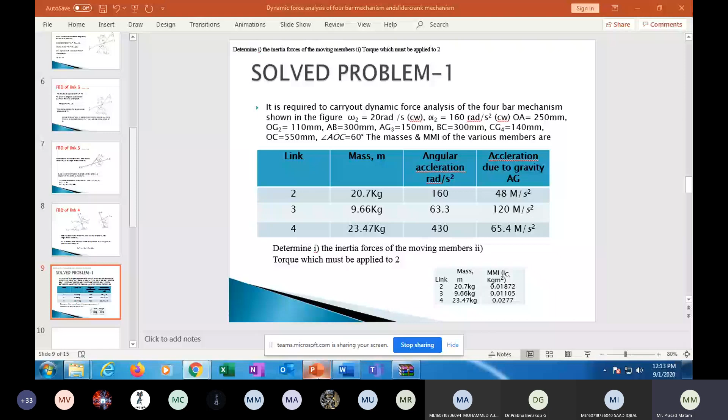Okay, now let us start our topic. Last class we discussed the dynamic force analysis. So again, let me recall what we have done in the last class. Just briefly, I want to revise what I have done previously.

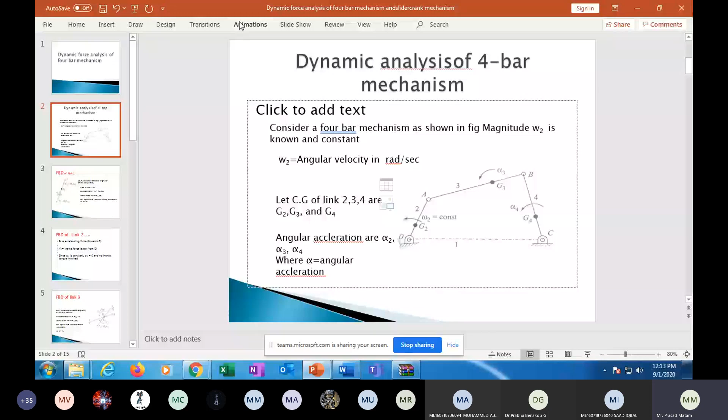So this is the 4-bar mechanism we have taken based on the dimensions. For this 4-bar mechanism, omega 2... okay, one sec, slideshow, pointer options. Okay, for this 4-bar mechanism, our aim is to find the dynamic forces acting on link 2, link 3, and link 4.

So for this, we have drawn the free-body diagram of all the links individually. G2 is the acceleration due to gravity at this point. Due to this acceleration, a force F2 is exerted towards O. And to maintain this equilibrium, we are keeping one more force, Fi2, the inertia force, acting opposite to the resultant force. This is how link 2 is in equilibrium.

Similarly, with respect to link 3 also, F3 is the resultant force and the balancing force is Fi3, that is the inertia force. Now these two are in equilibrium when F3 equals Fi3.

Similarly, this is how H3 is the radius. With G3 as the center and H3 as the radius, we have drawn a force vector Fi3. This force vector Fi3 is the combination of two forces, that is inertia force and inertia torque, Ta3, together combined to form a single force vector Fi3.

So we know as a result of this force and perpendicular distance, we are getting a torque. T3 is the resultant torque we are getting due to force Fi3 and H3, which equals Fi3 into H3. From this we can find H3 equals T3 by Fi3. T3 is the torque, which is nothing but I into alpha.

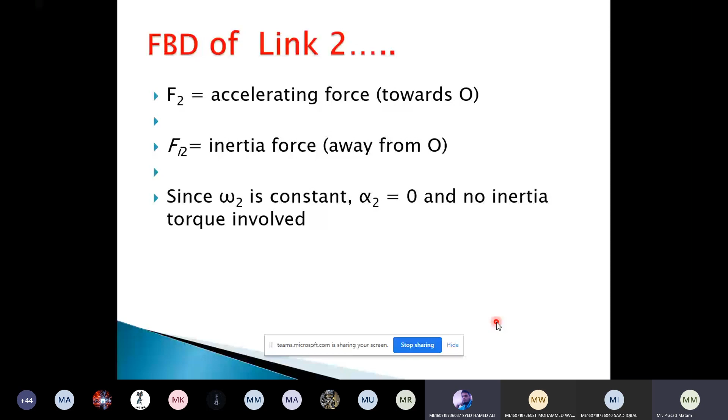So with this given data, we need to draw a configuration diagram of the 4-bar mechanism. They have given separately for link 2, 3, and 4, the mass of the link. M2 is 20.7 kg, M3 is 9.66 kg, and M4 is 23.47 kg.

Similarly, angular acceleration they have given: 160 radians per second square for link 2, 63.3 radians per second square for link 3, and 430 radians per second square for link 4. Similarly, acceleration due to gravity they have given: 48 meter per second square for link 2, 120 meter per second square for link 3, and 65.4 meter per second square for link 4.

So my question is, how did you get these values? Angular acceleration and acceleration due to gravity we can get from the acceleration analysis. For this 4-bar mechanism in kinematics, we will do the velocity analysis and acceleration analysis. From the velocity analysis, we get the velocity, and similarly, from acceleration analysis, we get the acceleration values.

For the same problem, we need to solve for the acceleration diagram. We have to draw the acceleration diagram, and from there we get all these values. Straight away, I am considering that you already know kinematics of machines. Similarly, for all the links, we should know the moment of inertia of all the links.

0.01872 is the moment of inertia of link 2. 0.01105 is the moment of inertia of link 3. 0.0277 is the moment of inertia of link 4.

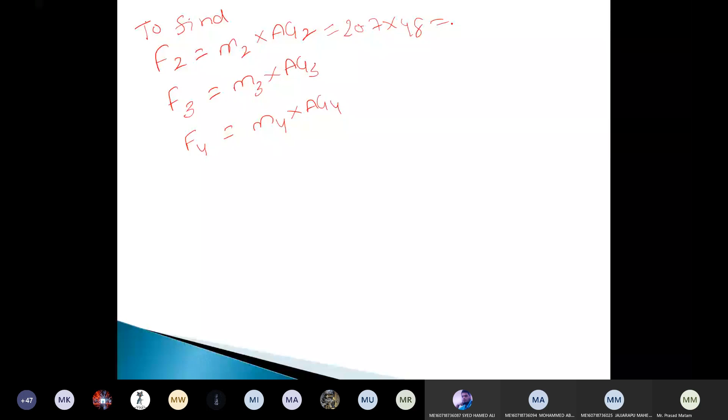What is the mass of link 2? Please answer. Mass is 20.7 kg, multiplied by the acceleration due to gravity on link 2, which is 48. Force on link 2 is 20.7 multiplied by 48. What answer are you getting? 993.6.

993.6. What are the units for this one? Newtons. Force is always in newtons.

Similarly for link 3, what is mass M3? That is 9.66. And acceleration due to gravity of link 3, AG3 value, is 120 meter per second square. Give me the answer for this one: 1159.2 newtons. Right, similarly find the force F4.

What is the mass acting on link 4? That is 23.4 kg multiplied by AG4, whose value is 65.4. If you take the product of these two, what answer are you getting? 23.4 into 65.4 gives 1530.36, that is nothing but 1530 newtons. Now we got F2 value, F3 value and F4 value.

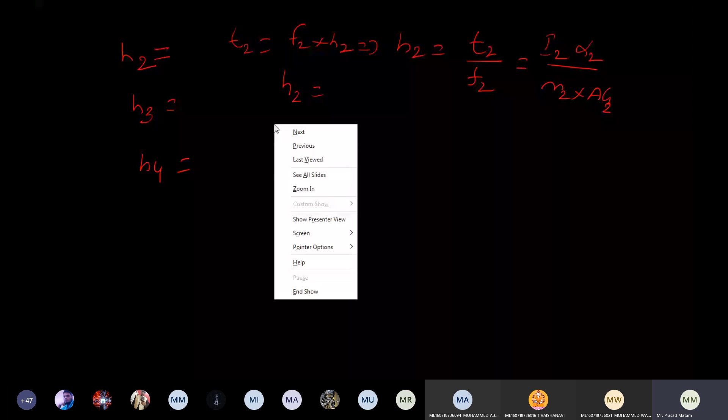So you can see here moment of inertia of link 2 is 0.01872. Just note down this. Moment of inertia of link 3 is 0.01105. Moment of inertia of link 4 is 0.0277. Write the moment of inertia of link 2, that is I2, which is equal to 0.01872, and I3 is equal to 0.01105, and I4 is equal to 0.0277. Sir, H2 just note down this.

160. What is the H2 value you are getting? 160, sir. Wrong. Wrong. H2 is 160 is wrong. Do again.

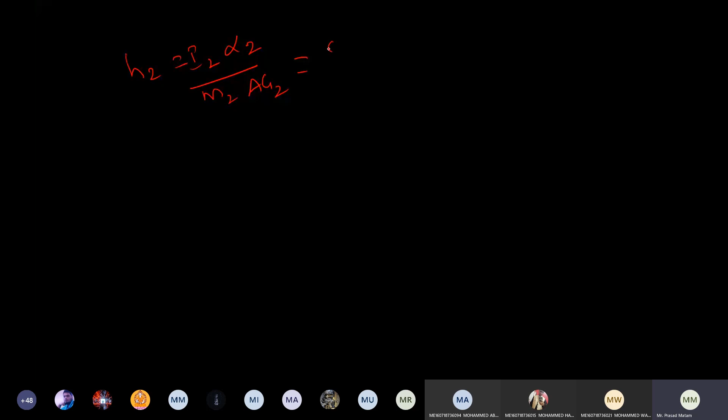Write H2 here. What is the formula for H2? Already I have solved earlier. Just are you able to see the screen now? I2 alpha 2 by M2 into AG2. So I2 I am getting, already I have given the problem, that is 0.01872 is the moment of inertia acting on link 2. What is the angular acceleration on link 2?

That is 160. What is the force F2 you are getting? Mass of link 2, how much you are getting? Or already we have found the force vector F2. What is the value of F2 we got? 993.6 newtons, which is a combination of M2 and AG2.

Now solve this and give me the answer. So on solving this, I am getting the answer as 3.01, sir. 3.01 into 10 to the power of -3 meters. This is the radius we need to find. So with this radius, we are drawing G2 as center. With this 3.01 as the radius, we have drawn the circle.

Similarly, let us solve for H3. What is the equation for H3 again? I3 alpha 3 by M3 and AG3, which is what is I3? I3 value you are getting it as 0.01105.

What is alpha 3? 63.3 radian per second square. What is M3 AG3, the force acting on link 3? What is the F3 we got? That is 1159.2 newtons. Solve this equation. How much you are getting? This value comes as 6.03 into 10 to the power of minus 4 meters.

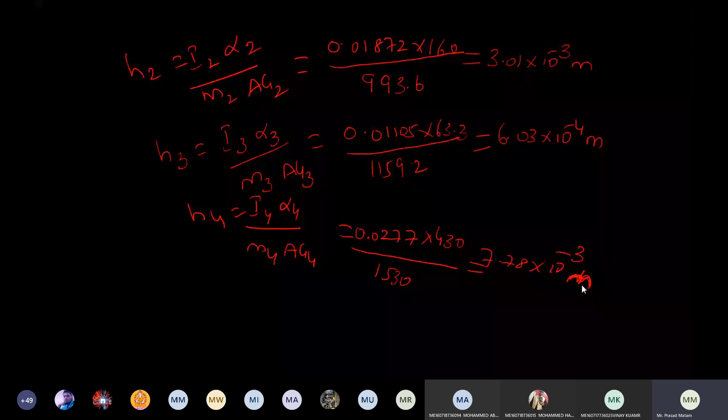So for link 2, this is the link 2 I am having, which is making an angle theta. This angle I have given as 60 degrees. Got it? So this is having torque T2. This amount we need to find. Okay, so now since this point, this is point O. This is, sorry, I will do again. This is giving some.

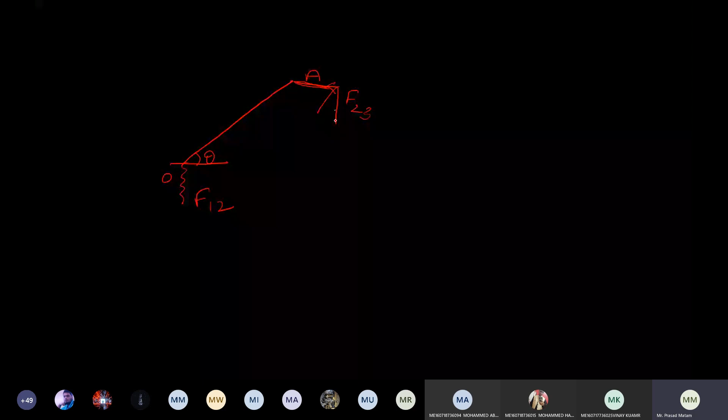For this force vector, we need to draw a perpendicular line straight. So here it is not showing a straight line - I will show here. A straight line has to be drawn. Extend these two lines, so this angle is 90 degrees.

Now F23 into this distance gives your torque. Measure this distance, H. This is OA - already we know the length made by OA. With the given length OA, we draw a line making an angle theta equals 60 degrees.

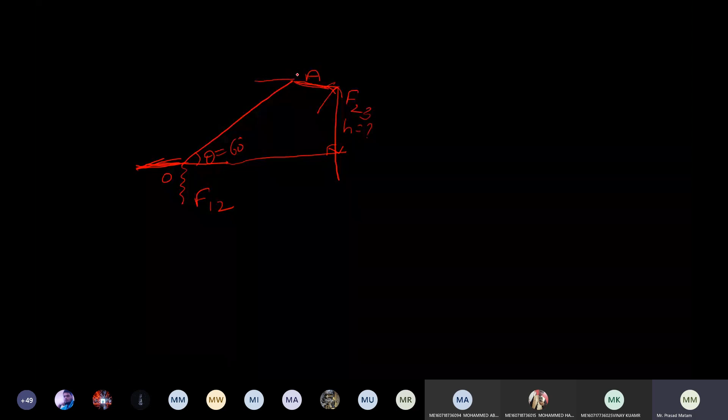Now if you know this force vector F23, to maintain equilibrium, one more force vector of the same value will act in this direction - sorry, opposite. The force vector will act in this direction, opposite to force vector F23. So this is moving towards, now this force vector has to move in this direction.

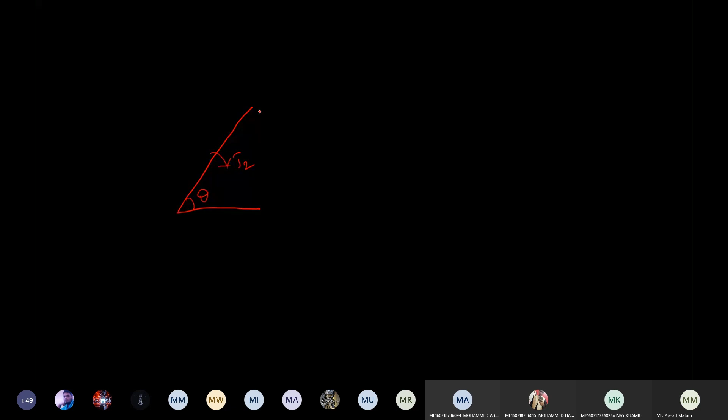So this is making angle theta. Our aim is to find T2. So this is the direction of the force vector F23. Similarly, F23 is always parallel to F12. This is the force acting at point O, this is point A. At point O, F12 is the force acting. At point A, F23 is the force acting.

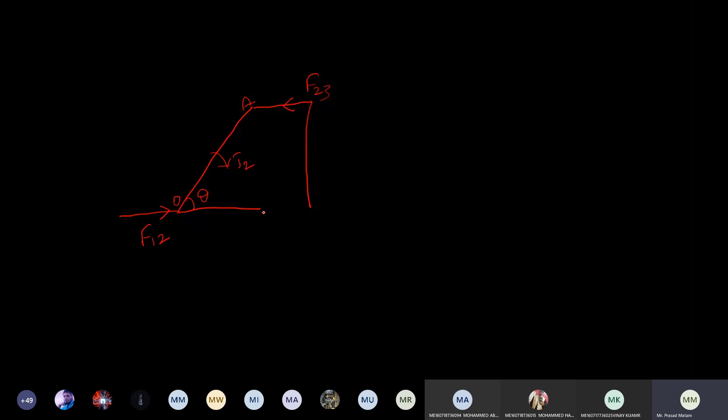Now what we are doing? We are drawing a perpendicular straight line to this. Extend these two force vectors - this angle is 90 degrees. Now F1, this is called height h.

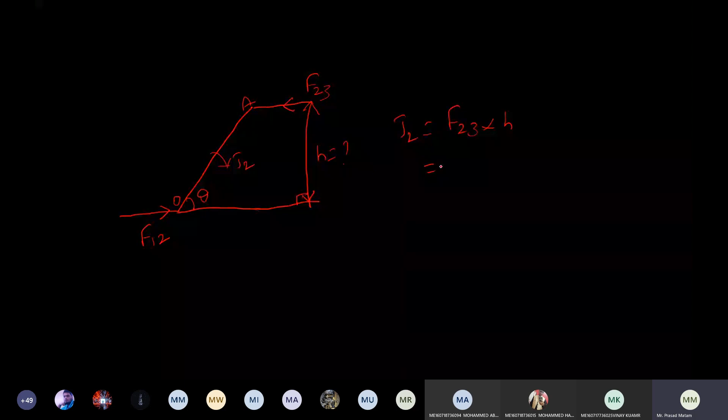Now measure this height h, and torque T2 is given as F23 into h. What is the F23 value we got? 993 into h, which equals some value in terms of Newton meter.

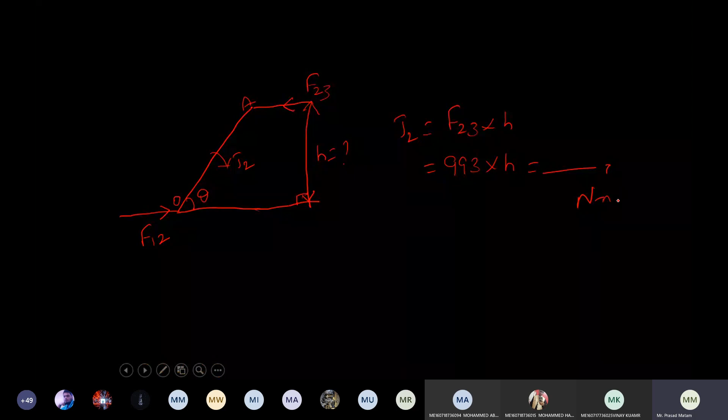Okay, this is how we can find the T2 value. I will exit the screen now, I will come back again.

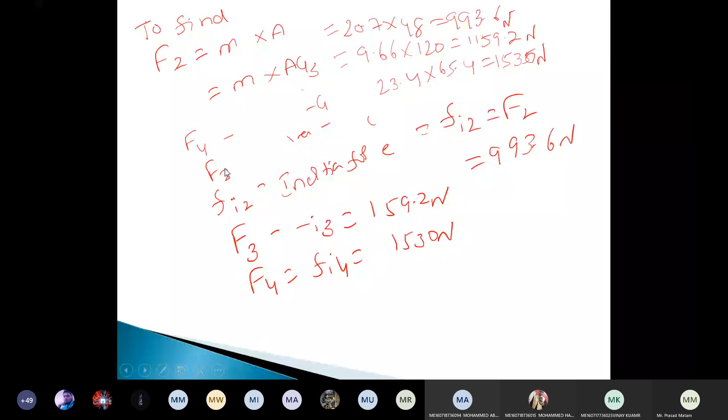Yeah, this is the solution. F2 I have typed properly. You get the F2 value, F3 value, and F4 value. Let me show the pointer on screen. This gives the F2 value, this is F3 value, this is F4 value.

This is how we need to find H2, H3, and H4. But I have not substituted all the values - just right away I will write the answers. Earlier I have shown how to find this.

Our aim is to show how we need to solve the dynamic force analysis. Apart from this, we need to solve torque T2, which I have shown earlier. Now, before dynamic analysis, one more topic is there - we need to discuss the D'Alembert principle.

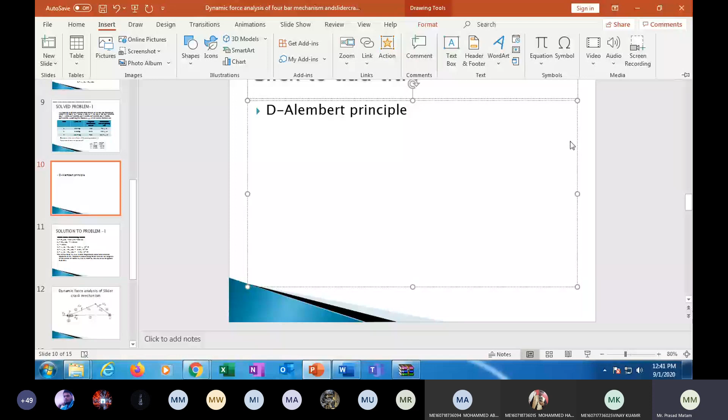So in D'Alembert principle, let us insert some assumed force vector. So in this force vector, draw a line. So what will happen if I apply force like this? Let's see.

Pointer option, okay. So here I'm having a force F. This force F is the external force I am applying. What will happen if I apply this external force? The block will move to a new position. When I apply some external force, the block will move distance x.

Now to maintain this equilibrium, for this external force F, we need to put one more force, called the inertia force, which opposes that motion. I am drawing the same block here, with this external force. When I put external force, the block will move.

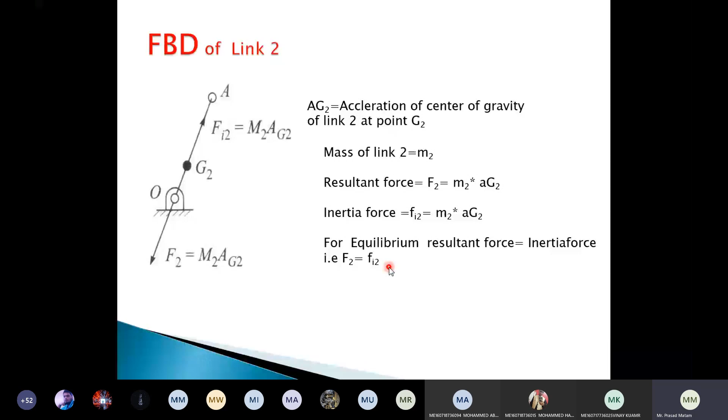Similarly, on link 3, F3 is equal to Fi3. Similarly, on link 4, F4 is equal to Fi4. These are the conditions for D'Alembert's statement.

So now, are you able to understand how to solve dynamic force analysis of a 4-bar mechanism? Please answer. If anyone doesn't know, let me explain again. Dynamic force analysis of a 4-bar mechanism - okay, I will explain again.

So this is the data they have given. It is required to carry out a dynamic force analysis of a 4-bar mechanism as shown in the figure. The figure I have shown in slide 1 as it is - this is the figure I am going to draw with the given data.

So they have given OA for link 2. What is the value of OA? 250 mm. Angular acceleration of link 2 is 160 radian per second square, and angular velocity omega 2 is 20 radians per second. All this data we get only by doing analysis - these values we don't get from anywhere else. We have to do the analysis, then only we will get all this data.

And OG2 is the position of link 2. G2 is the distance from point O, which is equal to 110 mm. And AB is link 3, whose length is 300 mm.

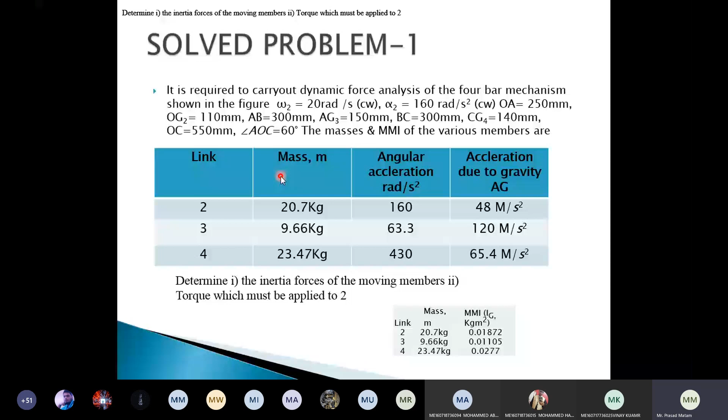Based on this problem, we need to draw the configuration diagram of a 4-bar mechanism, which I have shown in slide 1. Initially I have shown this diagram - it is being constructed with the given data.

Locate G2, G3, G4. Locate point OA, which makes an angle of 60 degrees. From A draw a line with the length of AB. You know the OC length also - from point C intersect this point and locate it. Now locate G2, G3, G4, which makes an angle of 60 degrees. This is the configuration diagram we need to draw.

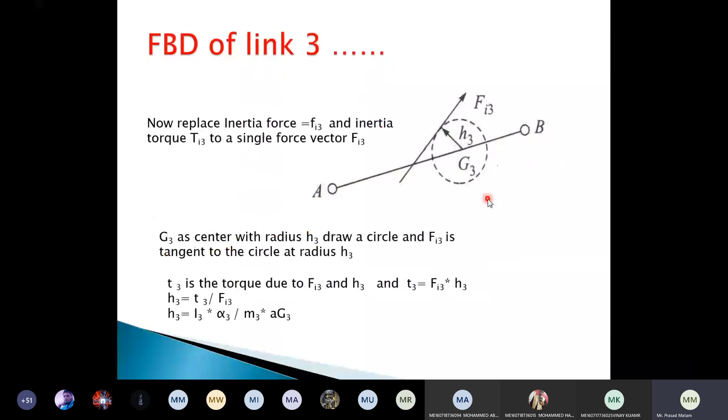Next, your aim is to find force F2, force F3 on link 3, and force F4 on link 4. Similarly, you are supposed to find this H3 distance and this H4 distance. Formulas are there to find H3 and H4.

This is how I am solving for inertia forces. I am trying to find F2, which is equal to M2 into AG2. I know the M2 value and AG2 - I'm getting the value like this. Similarly for F3, I'm getting the answer 1159.2 newtons, and for F4, 1530 newtons.

Next, I'm trying to find out H2. H2 is the radius from the center of gravity G2. H3 is the radius drawn from the center of gravity G3. H4 is the radius drawn from the center of gravity G4.

H2 formula we get is I2 alpha 2 by M2 into AG2, whose value is 3.01 into 10 to the power of minus 3 meters. Similarly, H3 is I3 into alpha 3 by M3 into AG3, which is equal to 6.03 into 10 to the power of minus 4 meter. Similarly, H4 is equal to I4 into alpha 4 by M4 into AG4, which is equal to 7.76 into 10 to the power of minus 3 meters.

We have found F2, F3, F4, H2, H3, and H4. Now you can see the statement.

The inertia forces Fi2, Fi3, and Fi4 have magnitude equal and opposite direction to the respective forces F2, F3, and F4, and will be tangent to the circular radius H2, H3, and H4 from G2, G3, G4 so as to oppose alpha 2, alpha 3, and alpha 4. When you oppose these angular accelerations, then only the four-bar mechanism is in equilibrium.

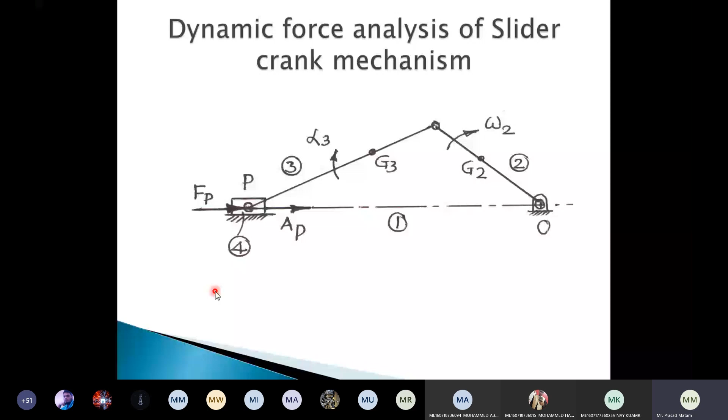Similarly, in static force analysis, we know how to find the torque T2 that I have explained earlier. Now, I have already explained the D'Alembert principle also.

There is a block where, sir, we have to just write applying that force - statement, sir. No, don't write the statement. I am just explaining on what basis you are making this equilibrium. Got it?

You know now how I am saying this is in equilibrium. On what basis? As per D'Alembert's statement, this has to be in equilibrium. This is the linked force I am having. The resultant force is acting here downwards. How is this in equilibrium? If you put one more force in the opposite direction, then only this is in equilibrium.

Similarly, here I am having a torque T4. How is this in equilibrium with respect to torque? You need to keep one more torque opposite to this torque. Then only this is in equilibrium.

Now, what is D'Alembert's statement saying? Sum of all the forces acting on the component should be equal to 0. Meaning F4 and Fi4 together equal to 0. T4 and Ti4 together equal to 0. Then only this is in equilibrium. Got it? That is what I have shown in this.

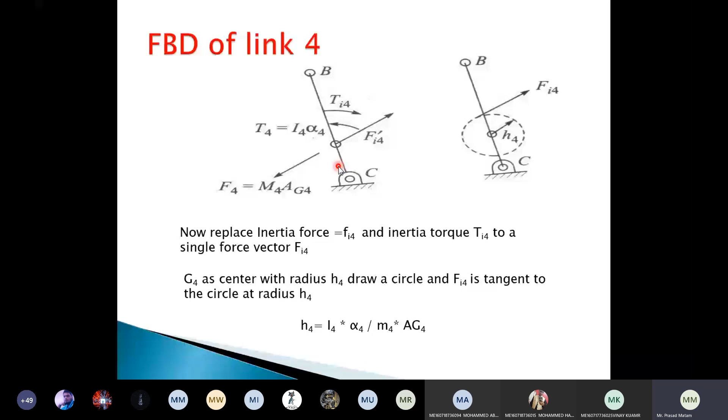This is the block. I am putting a force here. If there is no force here, what will happen? This block will move to a new place. Now this is no more in equilibrium. This is having some motion.

Now what I am doing for the same block is applying a force here. To maintain this equilibrium, what I am doing? I am applying one more force opposite to this force here. The opposite force is Fi. Now as per D'Alembert's statement, how do I write this? The sum of resultant force F and inertia force should be equal to 0, or I can write like this: F is equal to minus Fi.

This is the base for the dynamic force analysis. D'Alembert's statement is the base for doing dynamic force analysis.

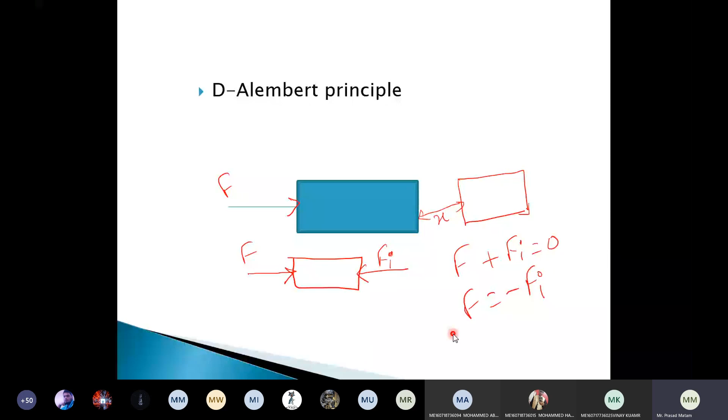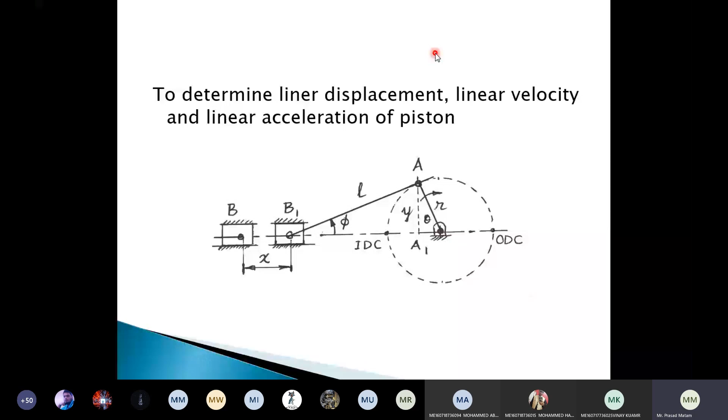Next class, we will solve the dynamic force analysis of the slider crank mechanism. This dynamic force analysis can be done in two methods: one is the graphical method and one is the analytical method. Next, I will go for the analytical approach only. I don't want to go for the graphical method. I want to go for the analytical approach, and my aim is to find displacement of the piston and velocity of the piston.

So I have not derived these formulas straight away; I have taken these formulas. Based on these formulas, we solve the problem. So whenever we are free, we will derive this equation. How are we getting x equal to this equation? How are we getting velocity of the piston equal to this equation? How are we getting acceleration of the piston equal to this equation? These three equations we will derive whenever we are free.

Right now, I am not deriving it. From an examination point of view also, they don't ask for these derivations. Right away, you can use these values: displacement formula, velocity formula, and acceleration formula. So if you find these three, that gives the analytical approach.

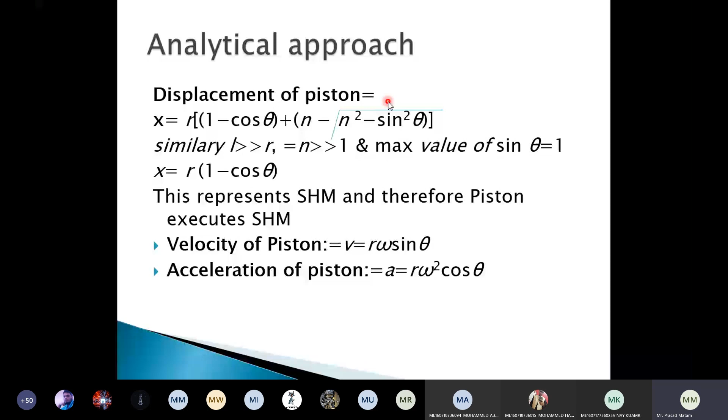Sir, how to find T2, sir? T2, I will explain again.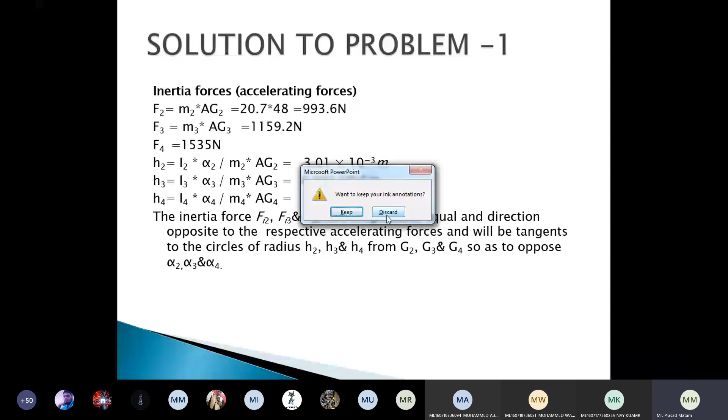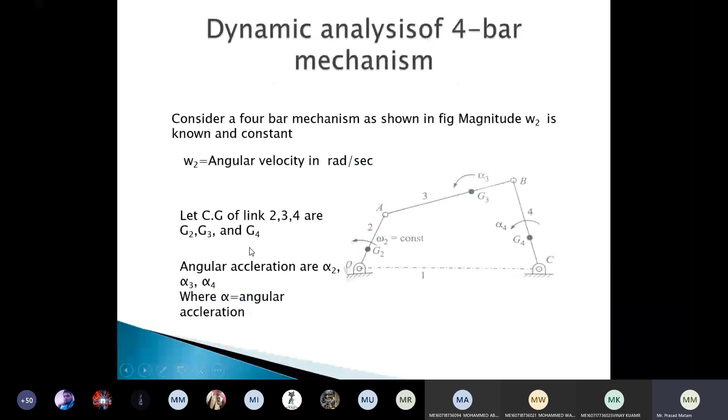Okay, again I have to go for the F5. Keep it. Yeah, I will show. Then only I can. So I will point to the options, I will take here. I will take a pen. So imagine this is the link. I'm not getting straight lines. Don't bother, please. Right, understood.

This is link 2, which is making an angle of. I will use the pen here. Eraser. Okay. Pointer options, pen. Okay, this is my baseline. It is going downside. Okay, I'll make a blank screen.

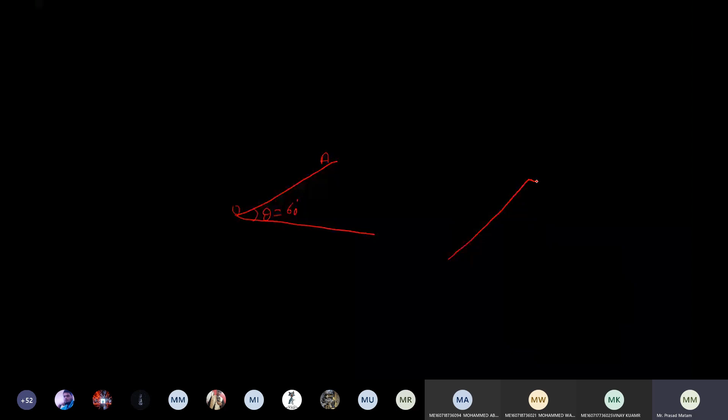Point option pen. Okay, I will draw like this. This is the force vector acting like this, which is written as F23.

Similarly, to maintain this equilibrium, one more force vector will act in this direction. This one is moving towards the left side, and this one is moving towards the right side. I can write this as F12.

Now, for this force vector, I am drawing a perpendicular line which makes an angle of 90 degrees. These two are perpendicular to each other. Now measure this distance h. You will get some value.

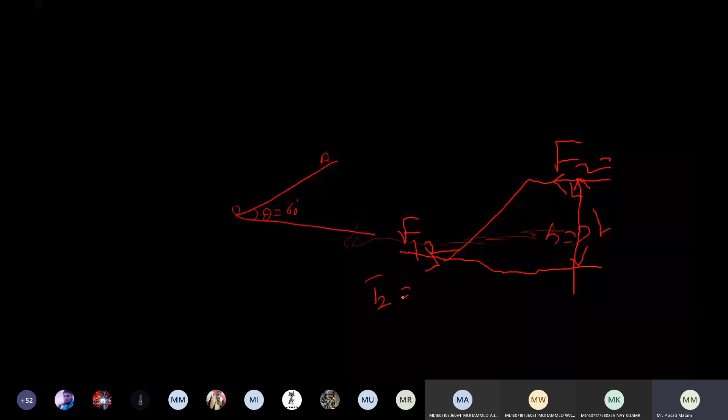Now, how do we write T2? Force into distance, that is F23 into h. F23 is the force acting on link 2. How much link 2 force did we get? 993 newtons. Measure this with the help of a scale only, we need to draw this distance h. You will get some value for h. Put that value here.

Okay, which gives the answer. This is the torque, we can write it as newton-meter. Sir, how do we get the length of F23? How do we know what length we have to draw? No length at all, we only need to know the OA link length.

So OA, the length of link OA, is 250 mm, right? Draw a line OA of 250 mm, making an angle of 60 degrees. At point A, you draw a line exactly tangent to that point A.

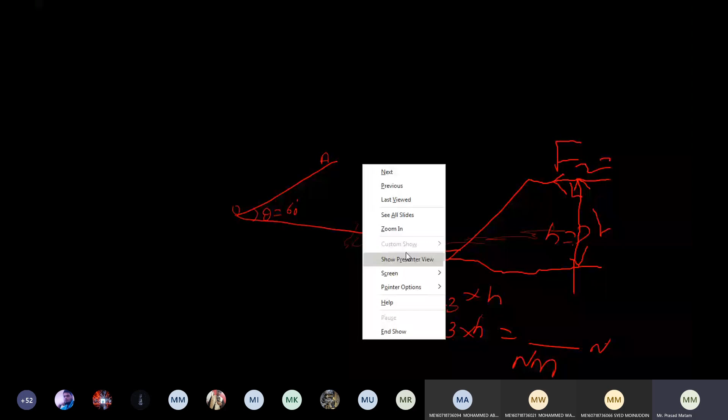I will show this again. Just let me unblack the screen. For next class, I will solve this. Remember, next class I will solve this. I will put a video regarding this. Here, I am not taking the pointer properly.

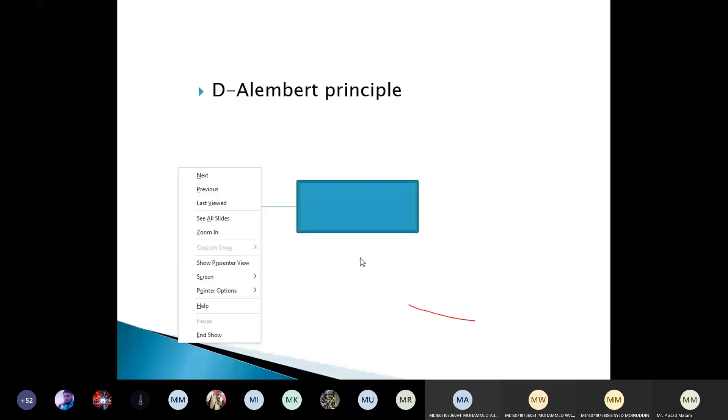Okay, I will tell how to find the torque T2. Next class, I will draw it properly. Here, I am not getting it properly. By Monday, I will solve it for you.

Monday class is there, I think. Not sir, Monday you make a video on the paper and send us, sir. Already I have sent it, no? No sir, this one, in the group it is there, this problem. This one also. Okay, I will do that. These are only the torque part, sir.

Okay, the torque. Already I have shown how to solve the static force analysis of the slider crank mechanism, step by step. Just go through that video. And sir, the torque analysis I will do again.